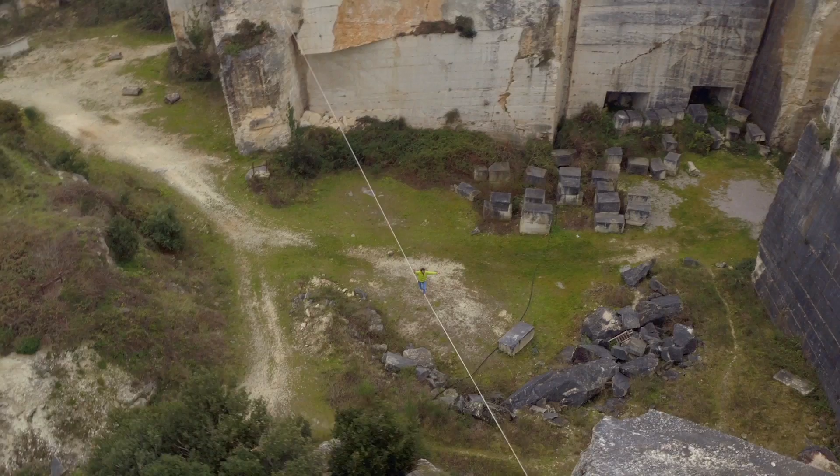At times, designing successful new applications for powder metallurgy can seem like walking a tightrope. You start out on solid ground, sure-footed in the knowledge of what your technology is capable of. But to get to the other side, you have to traverse a chasm of unknowns.

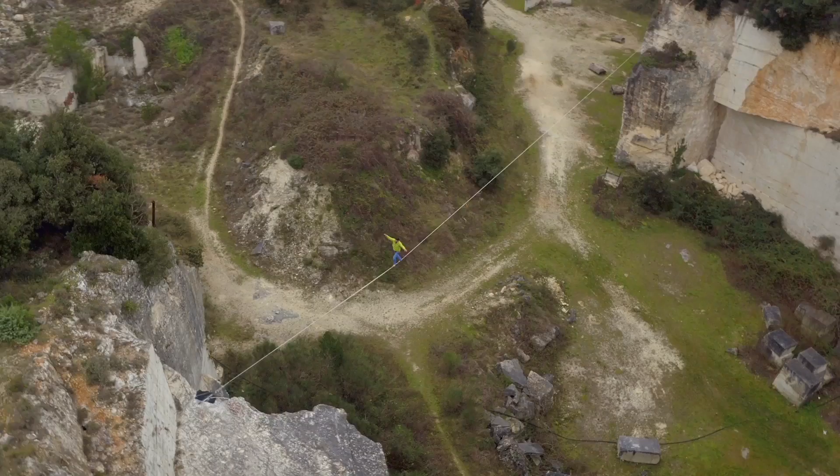You must be able to accept the risk involved, attempting to achieve something you haven't done before, with no guarantee that it will succeed. You know that it will call upon your ability to strike a delicate balance between a host of factors, like the choice of material, required physical and mechanical properties, available technological resources, and cost considerations. And through it all, you must never lose focus of your destination.

The winners in the 2017 PM Design Excellence Awards competition, sponsored by the Metal Powder Industries Federation, have successfully negotiated this difficult endeavor. Starting from their confident position of proven experience, they clearly envision the narrow path to get to a novel solution. They embraced the risk involved in taking the first step over the abyss because of the potential reward. They achieved a balance among all the competing considerations, and they kept their focus firmly on the objective, to demonstrate the inexhaustible well of capabilities PM can marshal in the service of component design.

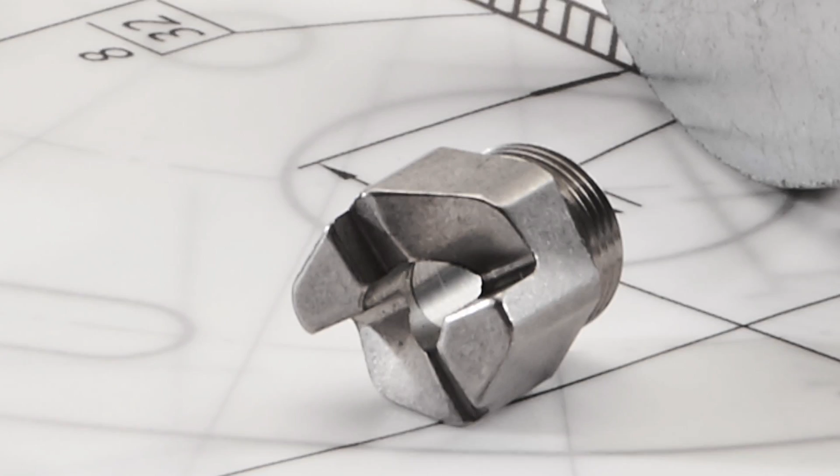In the process, they've created new opportunities for their technology, establishing a new premise upon which they can stand before walking the tightrope the next time.

Ladies and gentlemen, at this time, we proudly present to you the winners in this year's competition. 8 grand prizes and 10 awards of distinction have been given. We'll begin with the awards of distinction.

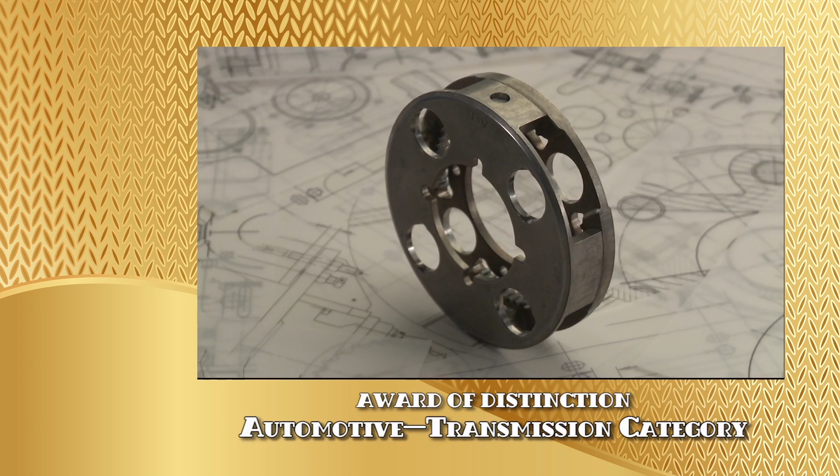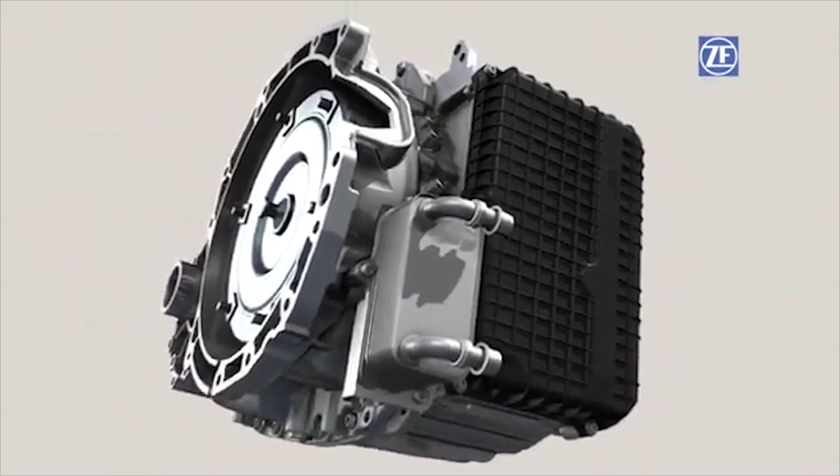An award of distinction in the automotive transmission category has been given to Stackpole International, Canada, for a sinter-brazed planetary carrier made for ZF Germany. The assembly, consisting of a guide plate and a spider, goes into a new 9-speed automotive transmission.

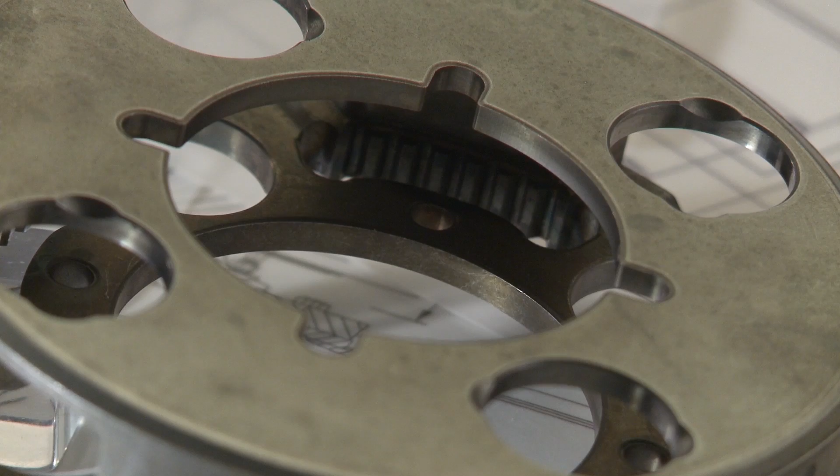The spider is made of a modified FC-0208 using 1 level of top tooling, 2 levels of bottom tooling, and 2 separate core rod sets. The guide plate, made of modified FX1008, is compacted using 1 level of upper tooling, 2 levels of lower tooling, and 3 separate core rods. The 4 segments of spline are formed by 4 independent tooling elements.

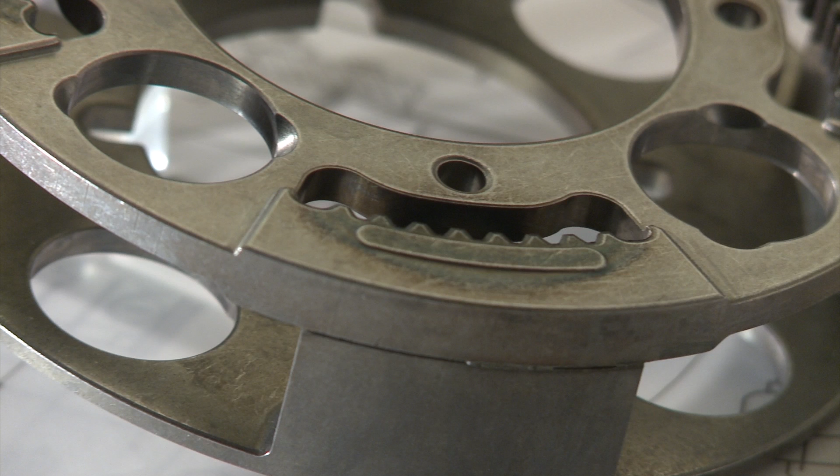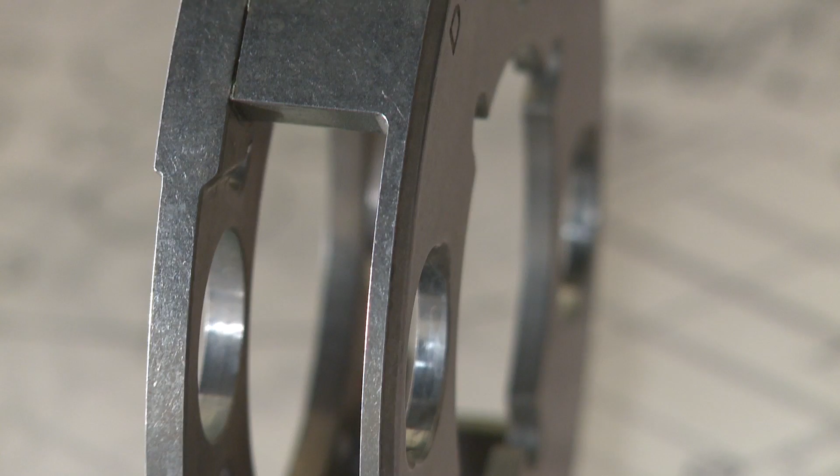The dimensional control of the net-formed splines was one of the toughest challenges of the product through the compacting, sintering, and induction hardening operations. The PM design solution for a lightweight carrier met all the customer's design and durability requirements, helping the transmission provide a 12 to 16% fuel economy improvement, all the while delivering an estimated 20 to 30% cost savings over alternative manufacturing technologies.

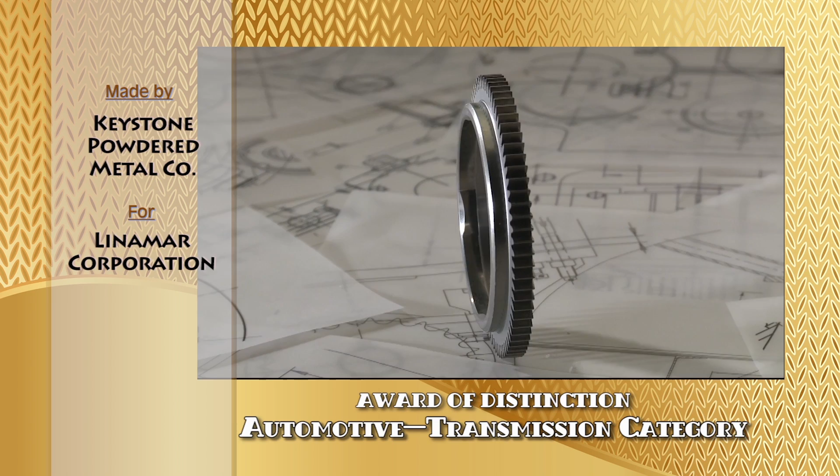Another award of distinction in the automotive transmission category goes to Keystone Powdered Metal Company for an oil pump drive sprocket made of pre-alloyed steel and fabricated for Linamar Corporation, Canada. The part is used in a new 10-speed automatic transmission that goes into the Ford F-150 truck. The 2-level part is made net shape on the gear teeth and complex ID with its 4 radii flats.

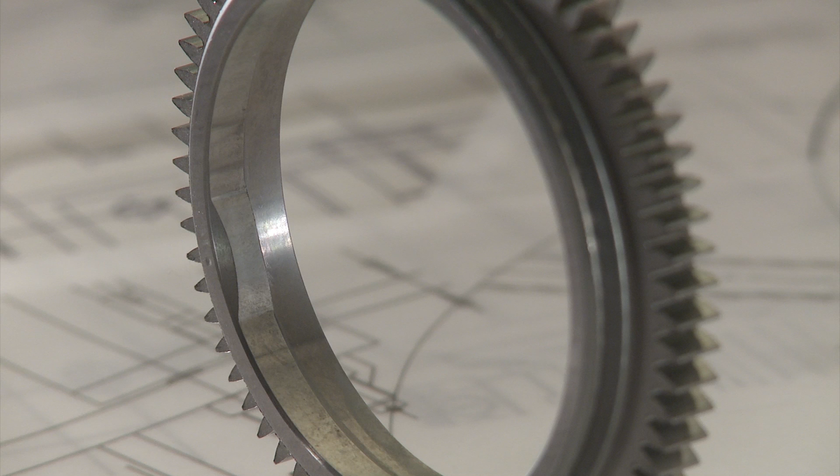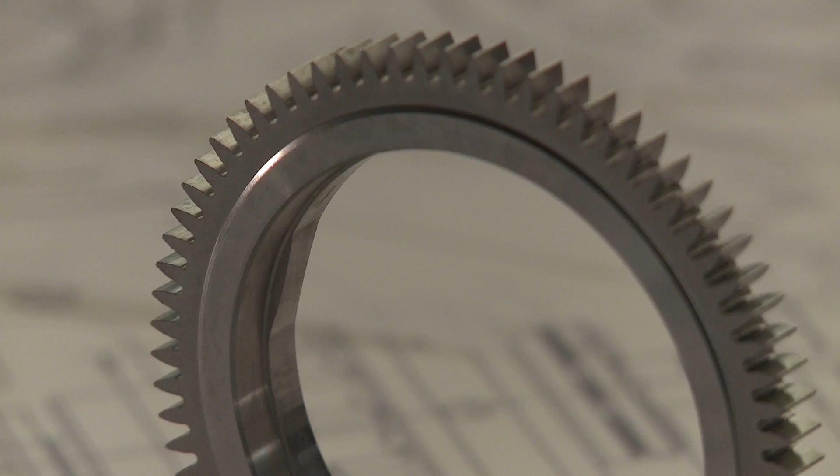Achieving this required not only great precision in the tooling, but also tight process control for weight and density. Only the sprocket's counterbore and datum face require machining. By eliminating the grinding operation on the teeth that would normally be required to meet the gear profile tolerances, the original PM design part produced cost savings estimated at 50%. The part passed extensive durability testing, with particular emphasis on noise, vibration, and harshness, or NVH requirements, so critical in automatic transmissions.

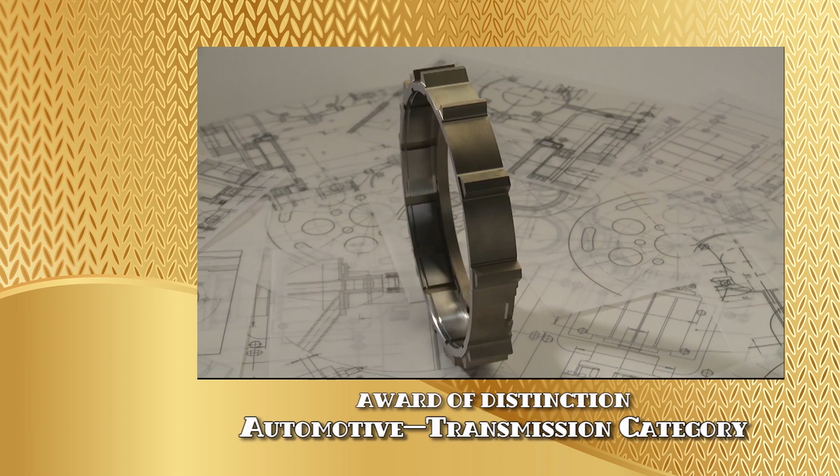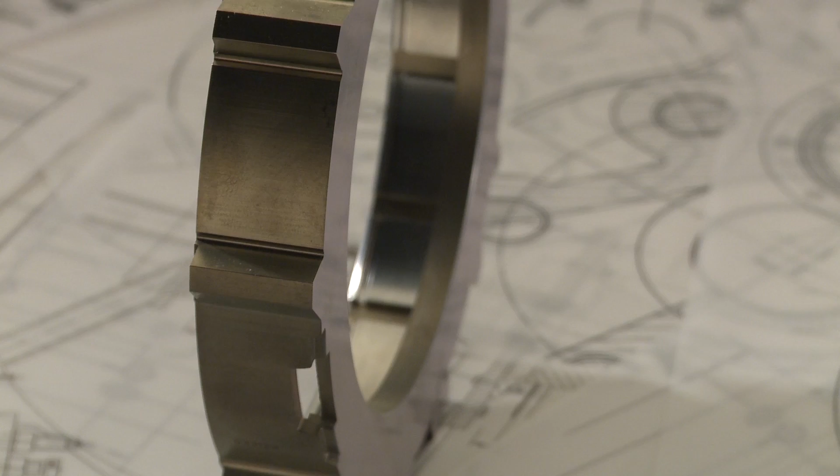The final award of distinction in the automotive transmission category has been won by Burgess Norton Manufacturing Company, Incorporated, for a sinter-hardened steel pocket plate made for Means Industries, Incorporated. The part is a major component of a controllable clutch, a new design for multi-speed transmissions. Removal of clutch packs enabled by the controllable clutch design makes possible smaller 9 and 10-speed transmissions, which helps the automobiles that use them achieve better fuel efficiency.

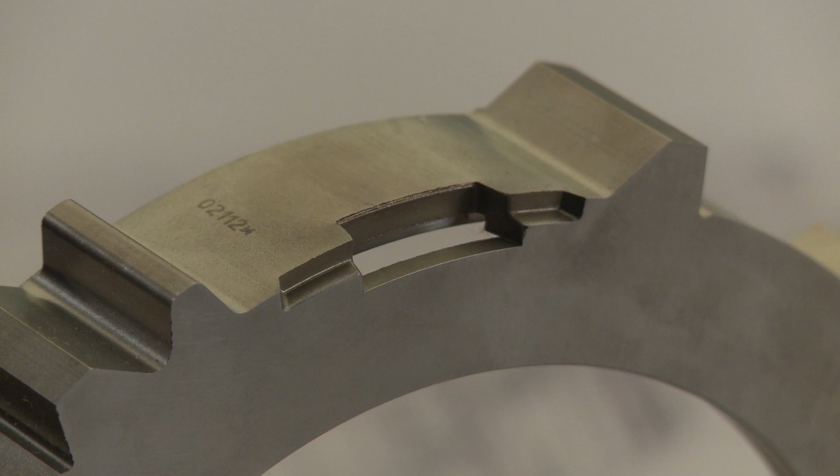The pocket plate is compacted on a 1,600-ton CNC hydraulic press using 4 lower levels and 1 upper level, and features this net-formed through window on the OD. Robotics and a sensor suite are utilized for deburring this window feature in the green state. Secondary operations include interrupted hard turning with a unique undercut feature, which required the development of a specialized insert, as well as brushing and washing.

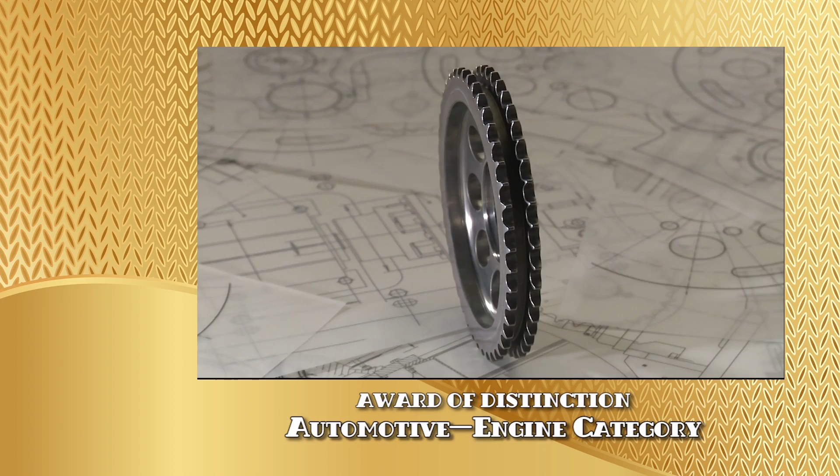The award of distinction in the automotive engine category was given to Netshape Technologies for a copper steel duplex cam sprocket made for U.S. Tsubaki. The part goes into the 4.4-liter Big Lion diesel engine in Land Rover's flagship vehicle, said to outperform any SUV on the road. The sprocket is formed on a 1,000-ton CNC hydraulic press using 2 upper and 6 lower punches, requiring excellent control of powder transfer.

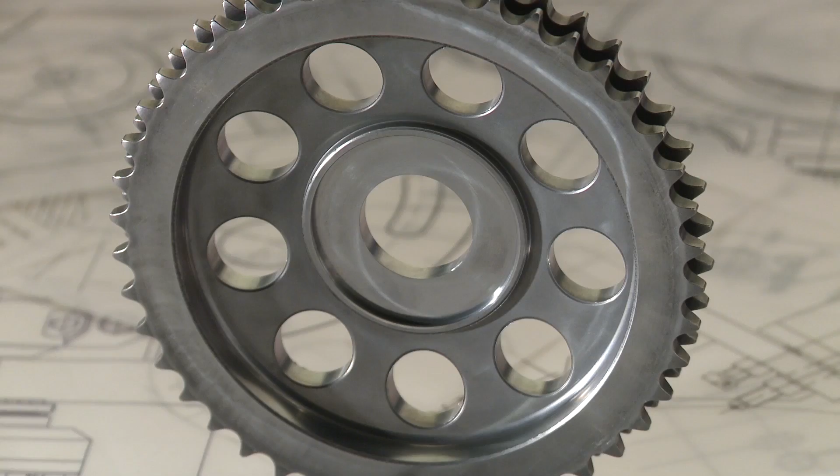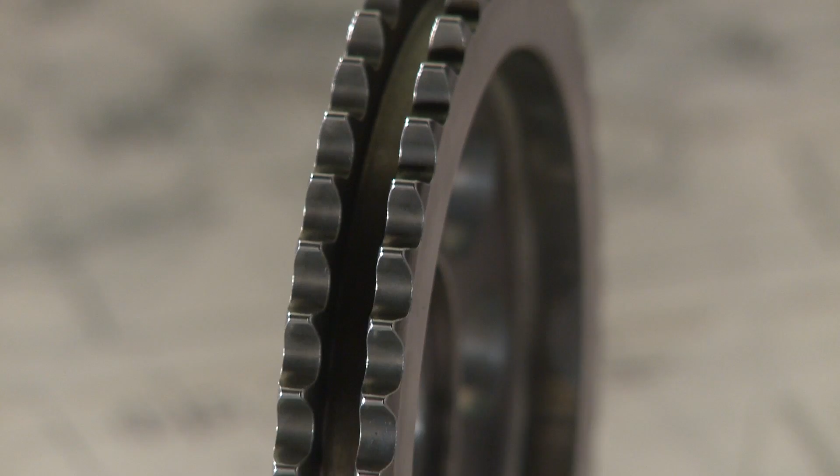The part's large size and thin walls, as well as the dome shape and features, make it more complex than is typically seen in many engine sprockets. All the multi-level features are formed net shape, requiring only minimal finish machining on the counterbore, bore, and faces, in addition to a high-end turning operation of the groove to make it a dual sprocket. An original PM design, the part offers an estimated 30% savings over the cost of machining it from wrought.

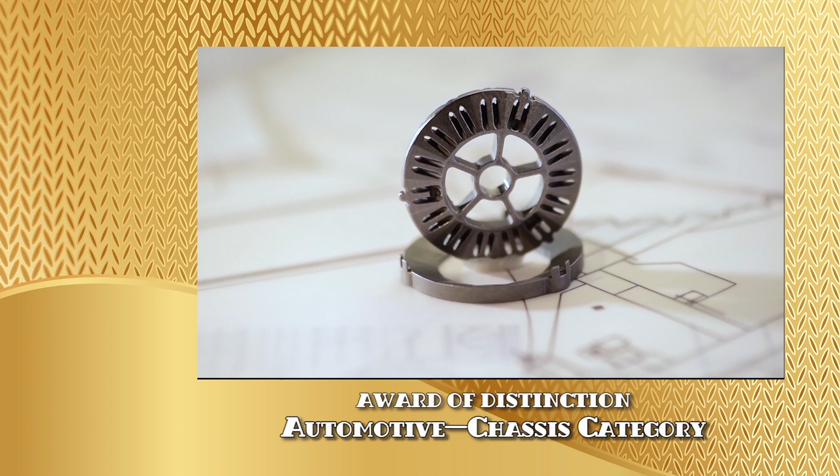The award of distinction in the Automotive Chassis category goes to Indo-MIM Private Limited for a MIM 4605 low-alloy steel top plate and check shim stop made for its customer, Multimatic Dynamic Suspensions Canada. The mating parts go into shock absorbers on the Chevrolet Camaro sports car.

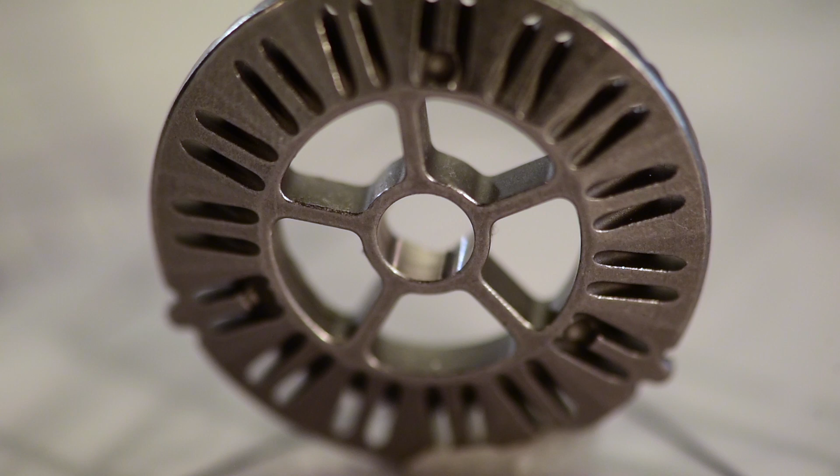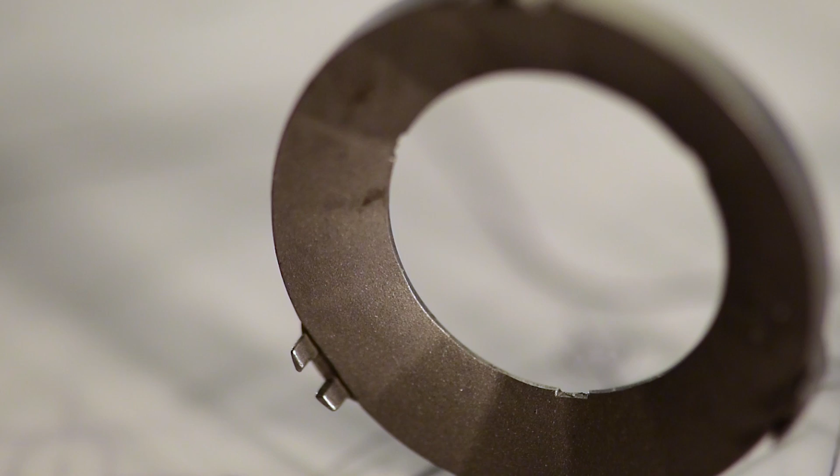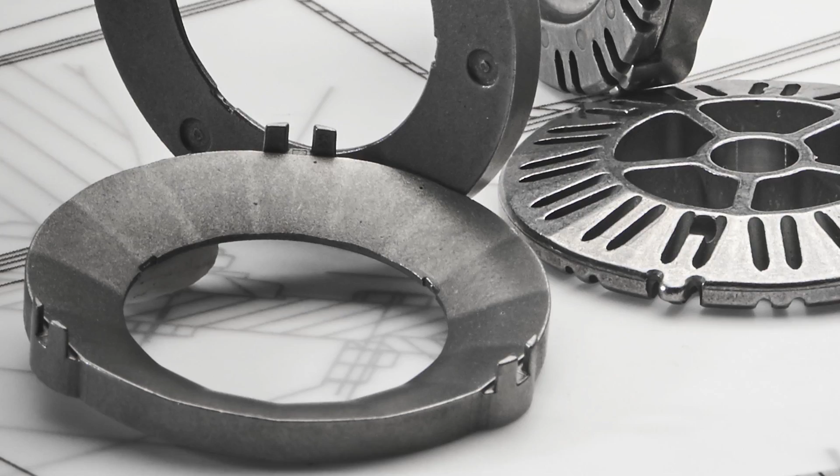The complexity of the top plate, with 30 oblong slots, 5 thin ribs connecting to a ring around a center hole, and varying thickness, posed a challenge to complete filling of the mold. An especially designed insert ejection system was needed for the check shim stop to avoid producing ejection marks. Both parts are produced close to net shape, with just one turning operation required on each. In replacing a machined part, the MIM design provided increased repeatability and accuracy, providing an estimated 25% cost savings. Annual production is 30,000 pieces and increasing.

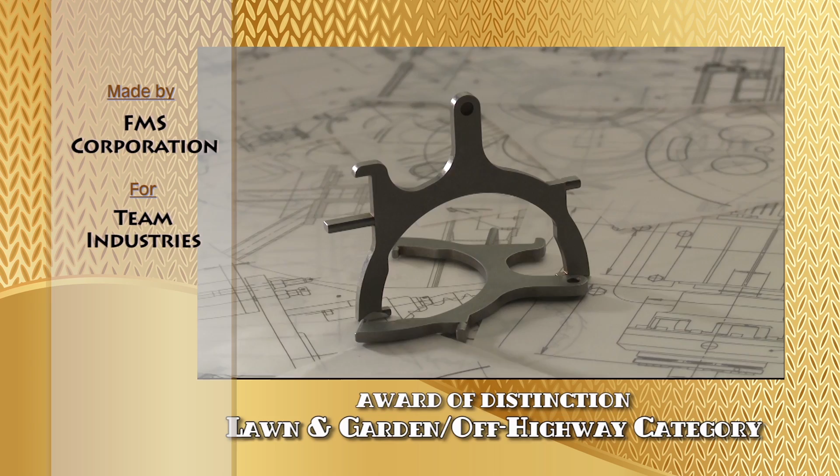The award of distinction in the Lawn and Garden Off-Highway category has been given to FMS Corporation for a sinter-hardened steel pivot shift fork made for Team Industries. The part goes into a shifting mechanism in an all-terrain vehicle transmission.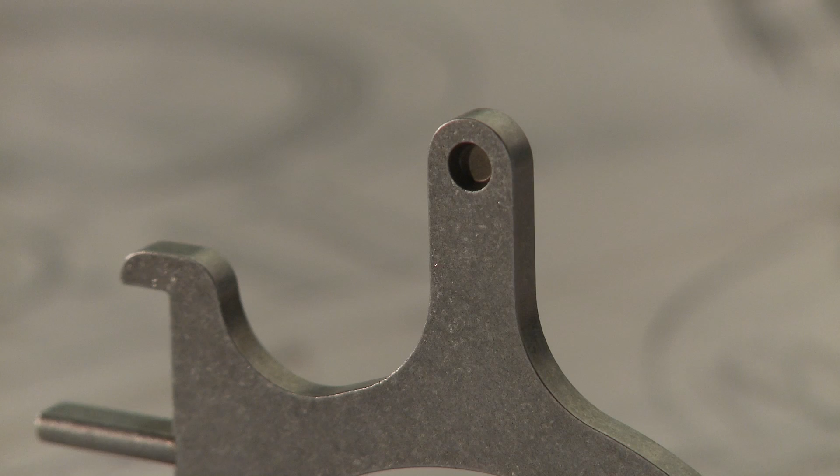The 2 sets of journals are an absolute requirement as they enable the fork to pivot, which is its very function. In the alternative fabrication process considered, a machined and ground stamping, assembled via welding with a pin, the journals represented a substantial cost. Careful engineering analysis by the PM fabricator determined that only a portion of the journal radius was required for proper functioning, and this could be achieved via a face form on the punch face. The estimated cost savings of this PM solution are 40%. The 0.015-inch flatness requirement, as well as the fatigue properties on the interface between journals and body because of their length, made this part design highly risky but ultimately very successful.

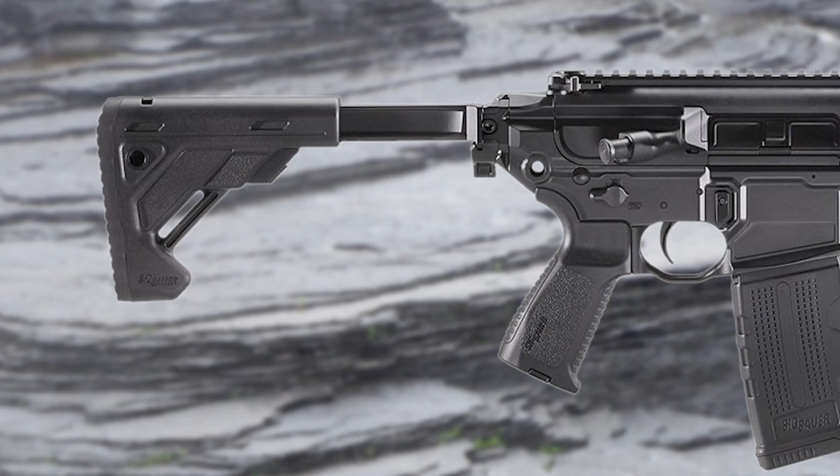An award of distinction in the Aerospace Military category was earned by ARC Group Worldwide for a MIM 4140 low-alloy steel latch made for Sig Sauer Incorporated. The internal latch drives a subassembly for the telescoping feature of the collapsible stock on MCX and MPX rifles.

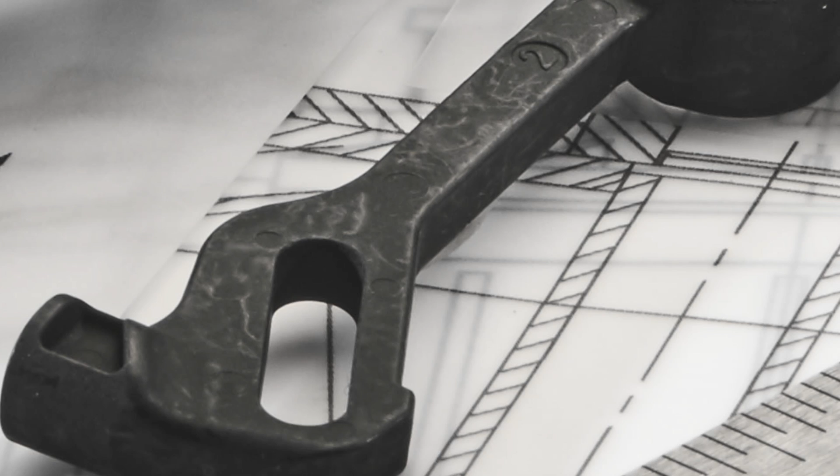Both the diameter and perpendicularity of the through hole in relation to the profile of the slot at the other end are critical for functionality. Those features, as well as the overall length of the latch, make this a challenging part to mold with no distortion in the finished product. The part is sintered near net shape, requiring only a reaming operation to achieve the tight plus or minus 0.001-inch tolerance on the through hole, in addition to several other minimal secondary operations. The part was designed for metal injection molding, as it could not be economically made using any other fabrication method.

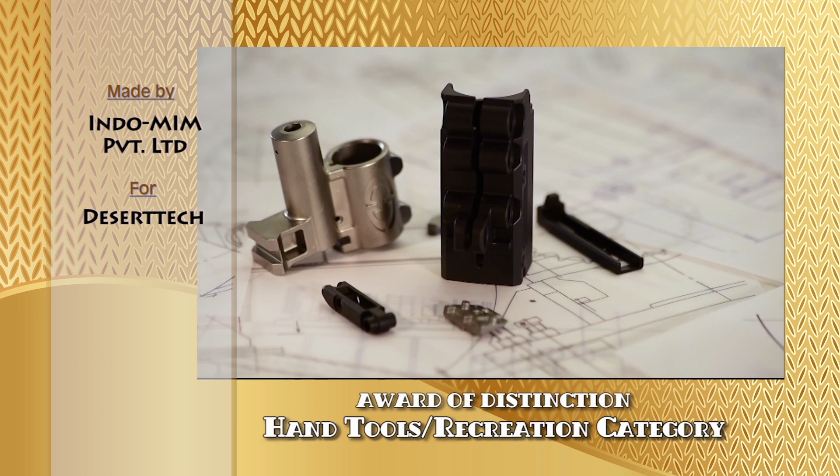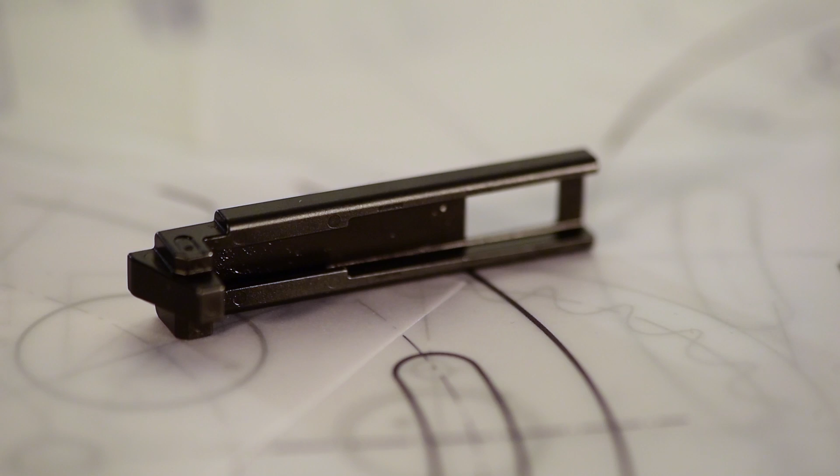An award of distinction in the Hand Tools Recreation category goes to Indo-MIM Private Limited for a set of metal injection molded parts: barrel block, gas block, bolt catch, 7.62 NATO mag conversion bar, ejector retainer, and extractor link, that go into an MDR rifle made by Deserttech. The barrel block, bolt catch, and extractor link are made of heat-treated MIM 4140 low-alloy steel, while the remaining parts are made of age-hardened 17-4 PH stainless steel.

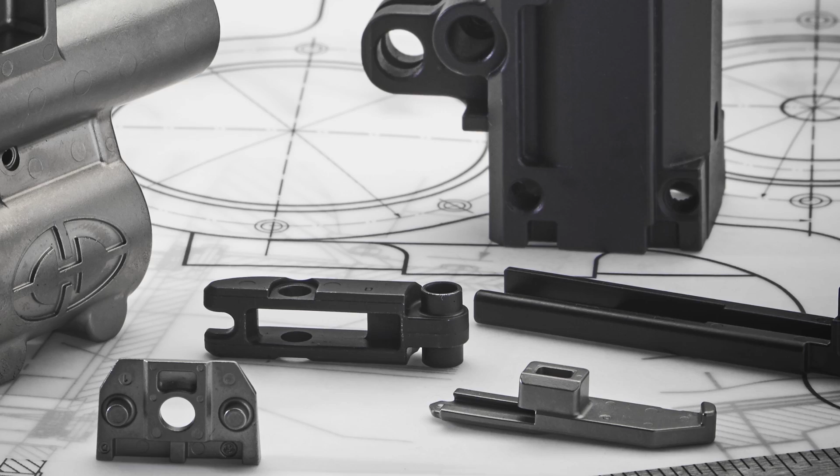The barrel block requires grinding, ID boring, and thread chasing operations, while the gas block requires only an ID milling operation. The rest of the parts are produced net shape with no secondaries needed. The MIM design parts replaced ones that were machined, with some having to be brazed together to form larger parts. In the process, the MIM parts reduced the cost by 30%, while manufacturing lead time was cut in half.

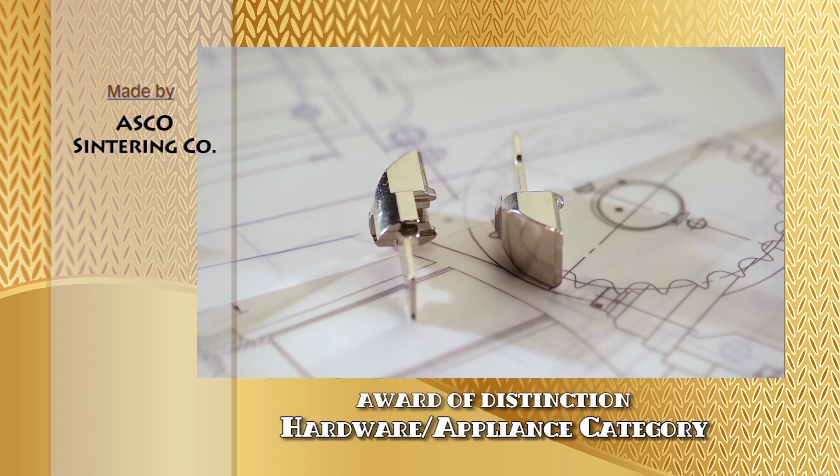An award of distinction in the Hardware Appliance category goes to ASCO Sintering Company for a copper-infiltrated steel bolt used in a commercial door lock system.

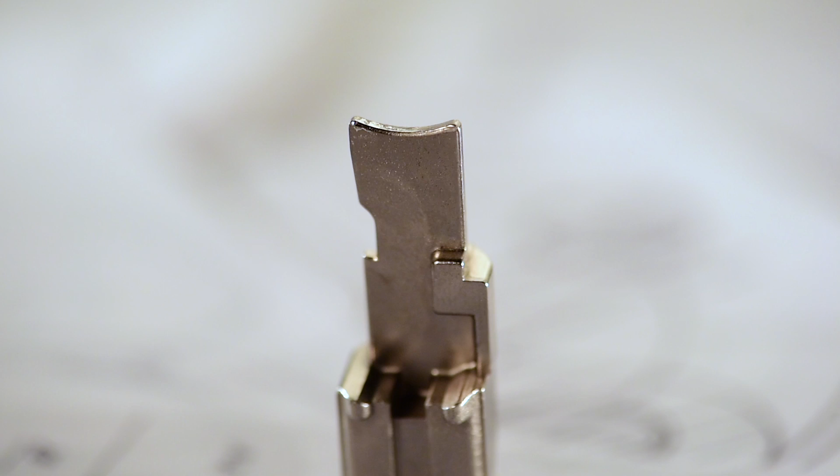The part's complexity, with its 9 levels, rivals that which is more typically seen in parts produced via MIM. However, it is conventionally formed, compacted using 2 upper and 2 lower punches and a shelf die, with multiple levels being incorporated in all of the tooling members and die shelves. Significant powder transfer and fill compensation is used to achieve the shape. The bolt is pressed and sintered to its final shape without any secondary operations. It is estimated to save 60% over the cost of other manufacturing methods.

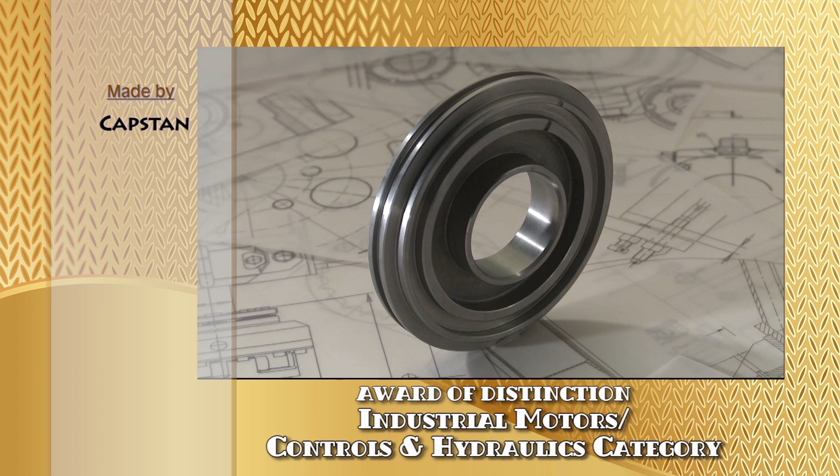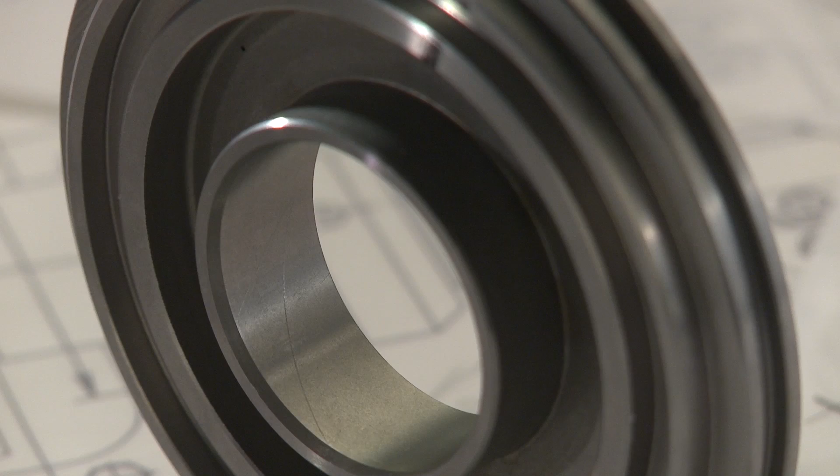An award of distinction in the Industrial Motors, Controls and Hydraulics category goes to Capstan for a copper steel clutch piston. The part is used in an industrial power takeoff system, a relatively new development for PM pistons. It is a multi-level compacted part that, combined with multiple secondary processing steps, yields a highly precise, machined and sealed PM component, an economically attractive alternative to a machined die-cast one.

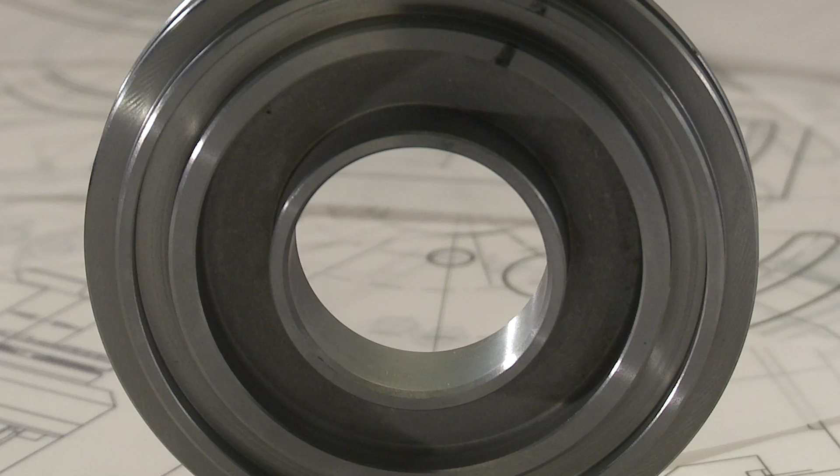After molding and sintering, the part is resin sealed to prevent oil seepage, deburred, and then CNC machined to achieve extremely tight diameter, runout, and flatness tolerances, which are held within 30 to 50 microns. This component is a prime example of how innovative machining techniques performed on precise, near-net as-sintered blanks can add great value and open up new markets for the PM industry.

Ladies and gentlemen, these are the winners of awards of distinction in the 2017 PM Design Excellence Awards competition. Please join with us in congratulating representatives of the winning companies as we invite them to come up to the stage to receive their awards.